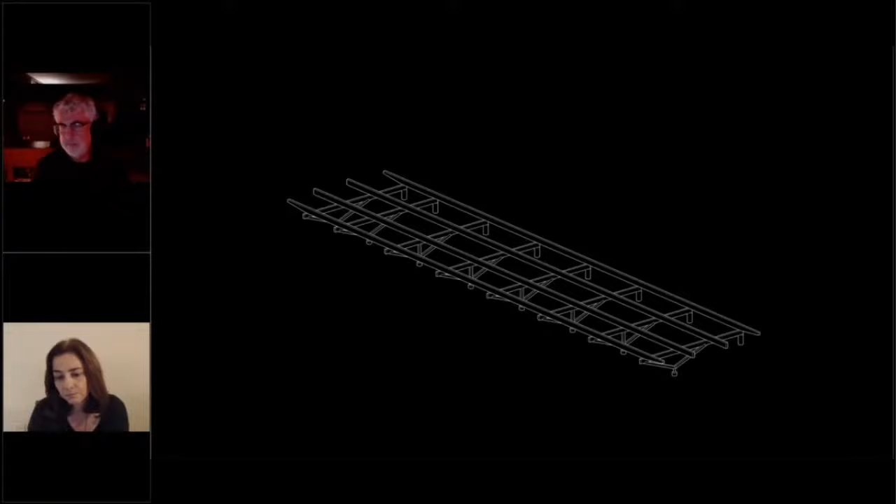The idea was to reach the platinum certification, so many decisions were taken to allow this certification to happen. The first thing was to keep the land in a very permeable way, so we touched the land in a few points. There are some concrete supports that hold the structure, and from those supports above, it's fully a wood structure.

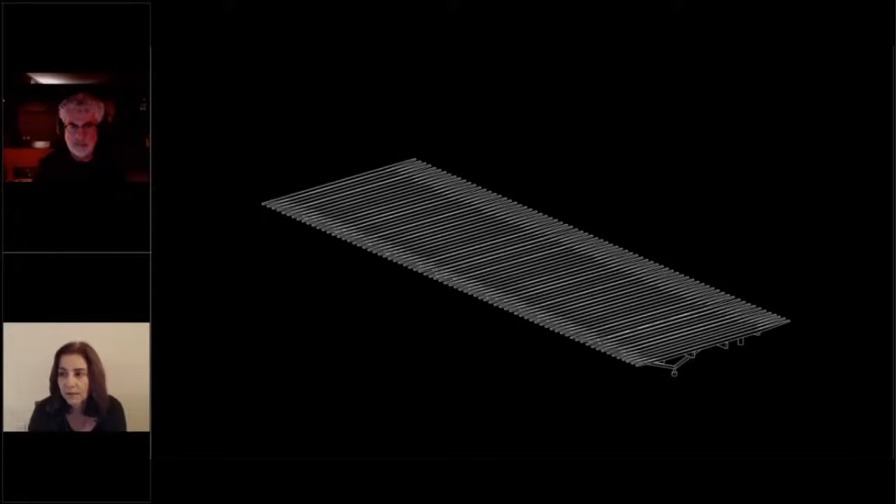The first slab is not a slab, it's a floor structure that holds almost the full house. From that floor structure we have the columns raising and producing a rhythm, a kind of modulation that can sustain all the program of the house, that organizes the program of the house.

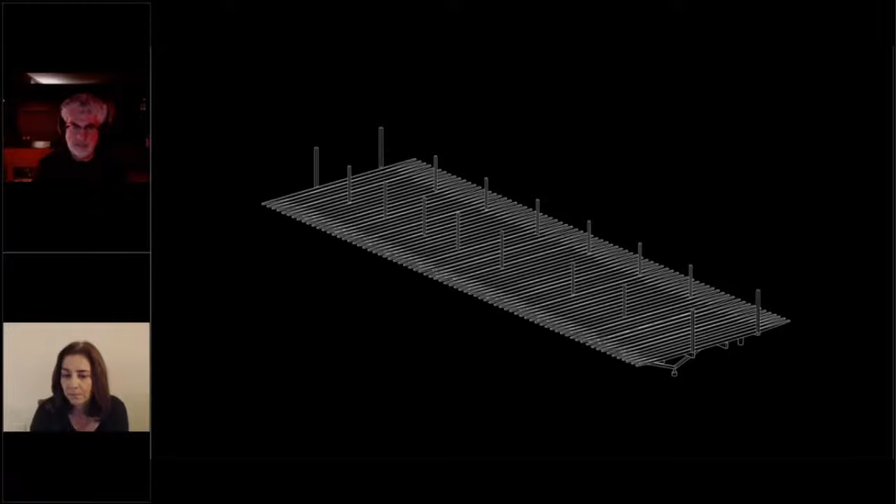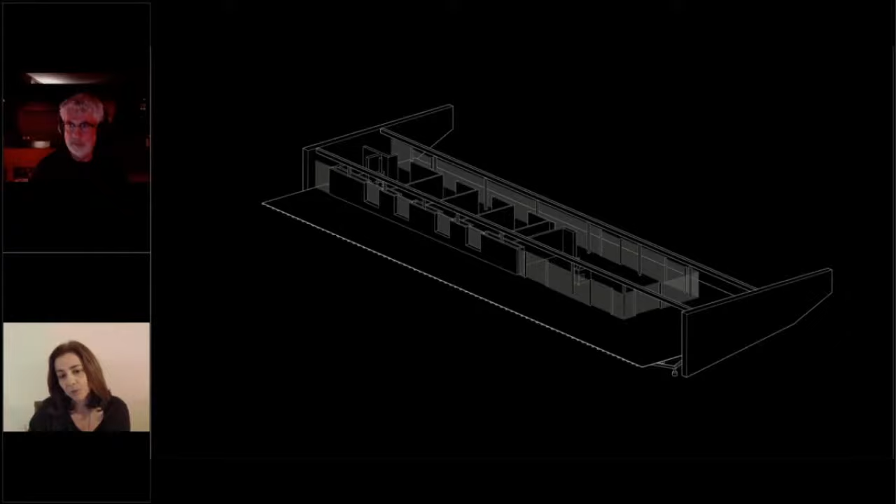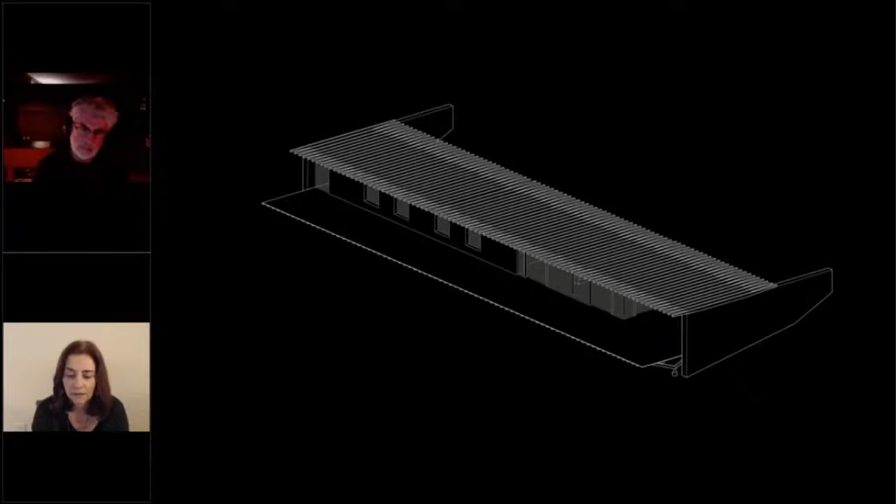I think the slides are passing very slowly, I'm sorry about that. So now you see the full structure, and after that what we see wrapping the house is the wall system. Those walls are also a wood paneling system protected by an insulation PET membrane that helps the insulation of the house. From those spaces we see, from the bottom, the veranda, the living area, bedrooms, and a big open space connected to the view.

This is the reason why the client chose this beautiful location. It's a mountain location with a beautiful view.

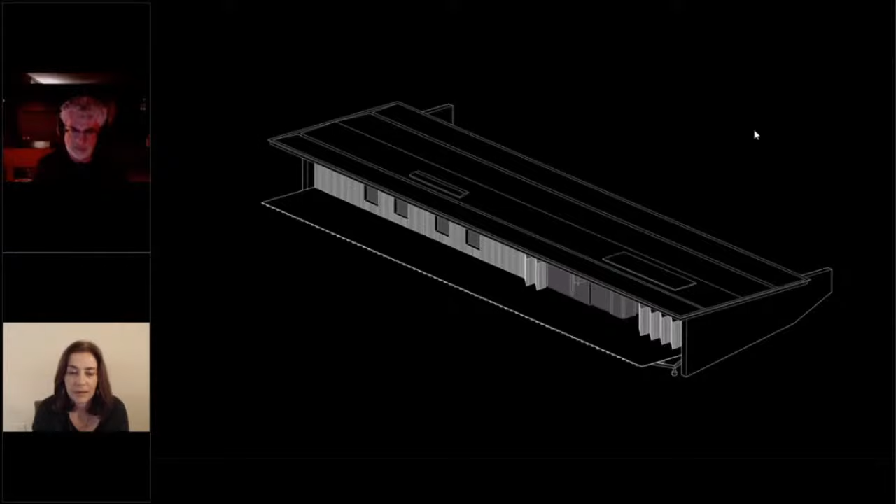The wrapping system, the facade system, is also in wood. We have some sticks that clad both the solid parts of the walls and also protect and create a light filter in the living and veranda areas. So this is the house floating in the mountains and floating towards the beautiful view.

All the elements were in wood. Also, the glazing panels had a wooden frame around, and the decking area is fully permeable. In the internal areas of the house we see some cladding, some tiles on the bottom of the floor, and the light filter creates the full light effect on the facade.

The second example is the Merkaza Volume C, located in São Paulo. The idea was to create a big cube, 15 by 15, without any columns in the center. This is for a client for whom we designed the other pavilion, Volume B.

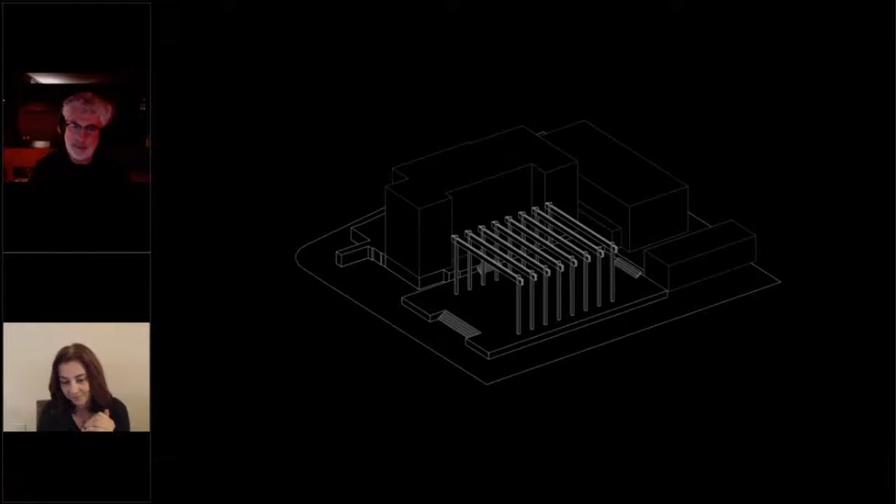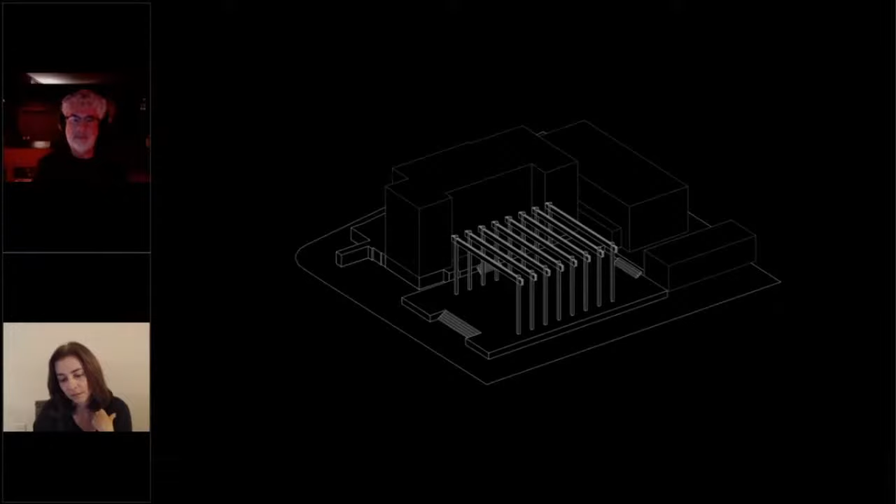The need for this flexible space has driven the structural system to allow a sequence of 8 porticoes that overcome a 15-meter span. You can move a little bit, and they are locked by an intermediate beam that also holds some extensions to hold the facade material.

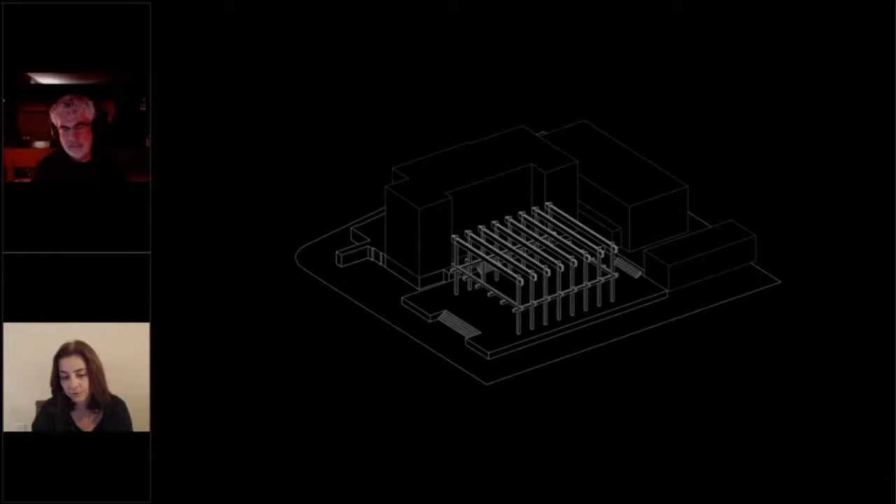The roof and the facade are connected to this structure. The top part is a polycarbonate system that allows light to enter, using translucent polycarbonate panels. On the bottom, you have corrugated metallic sheets that wrap the building.

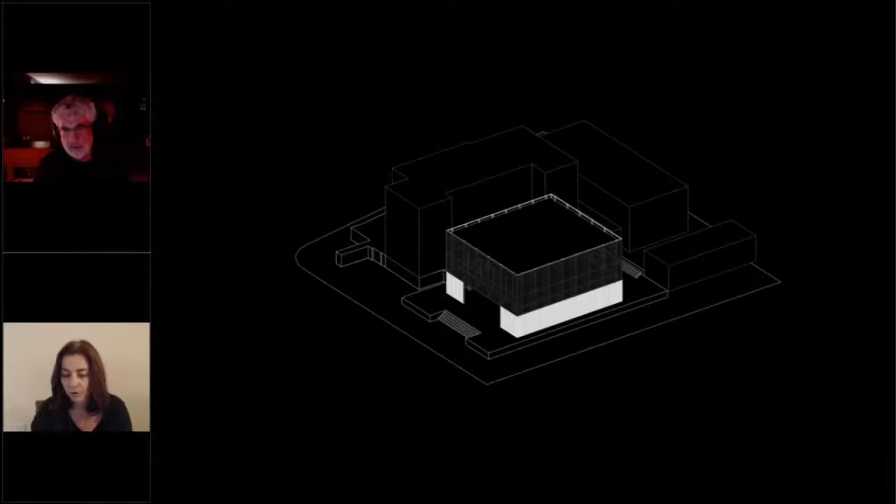On the top, we have wooden panels and just a waterproofing membrane. All the rainwater gutters run on the boundary of the building. The collection of this water was designed as exposed tubes that run behind the column, so you don't actually see them, but they are fully exposed.

It's important to say that this project, like the previous one, had its structure produced and designed by Carpinteria. This is a case where the structure works as the interior space itself - it's something that conforms the space and acts like the interior expression of the building.

The facade is just a wrapping system that protects from rainwater, but the space is really written by the inside. You see the connections between the beams and columns, the metallic connection between the concrete floor and the wooden columns - all designed very carefully in order to allow this design to be as minimalistic as possible.

The corner detail shows the double beam detail supported by the columns at the corner, along with the bracing cables and the substructure that holds the polycarbonate facade outside.

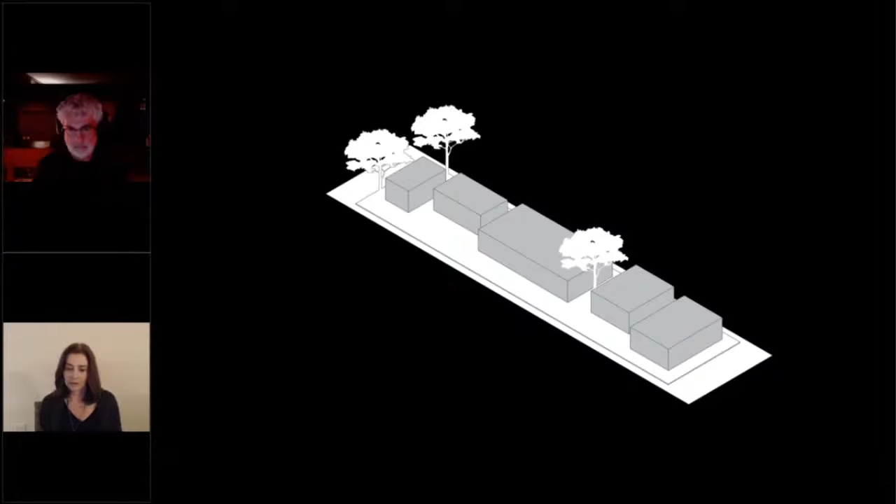The house is organized in a different way. You have the enclosed spaces along this decking area, and they are independent from each other. In the center you have the master bedroom and living area. On the left you have 4 guest bedrooms, and on the right you have the dining area and kitchen.

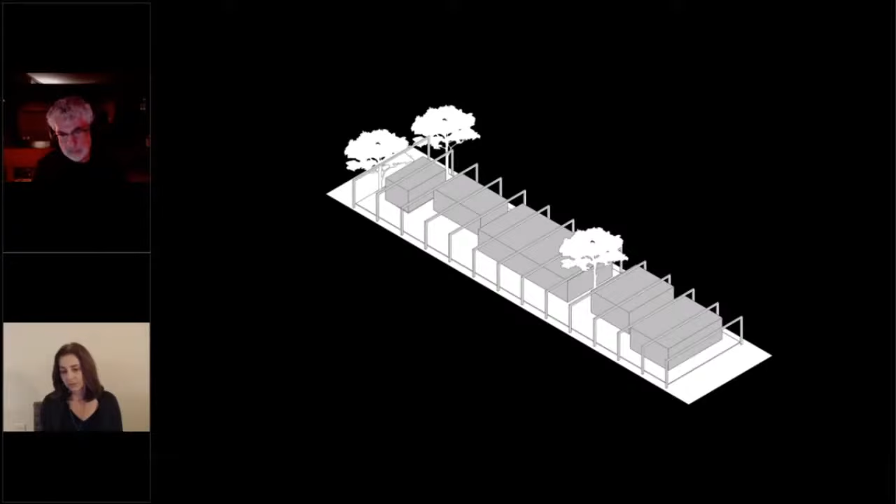This wooden structure wraps the house and creates a sort of intermediate space between what is actually inside and what is outside. It holds just a very light ceiling, a wooden stick ceiling that is not rain-proofed, but has a role to create shadow, like the trees that are around in the forest.

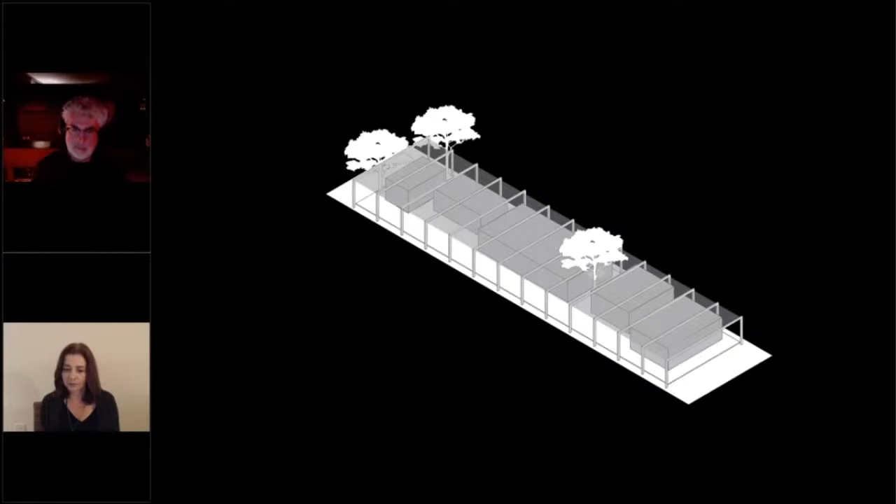This is the condition of the building - fully wrapped by the forest, and the role of this intermediate space is to create this in-between space of what is inside and what is fully outside.

It's a place to chill out, to meet friends, to meet people at night, to have a guest, having a glass of wine. It's a space where you can enjoy nature and be outside, not in as we are in the cities, but in Bahia you are allowed to be outside for many moments. It's a pleasant way, so the shadow is special in that sense to create this space where you can be.

These shadows, these light effects, touch the volumes and move, creating different expressions and atmospheres during the day, but also very connected to nature.

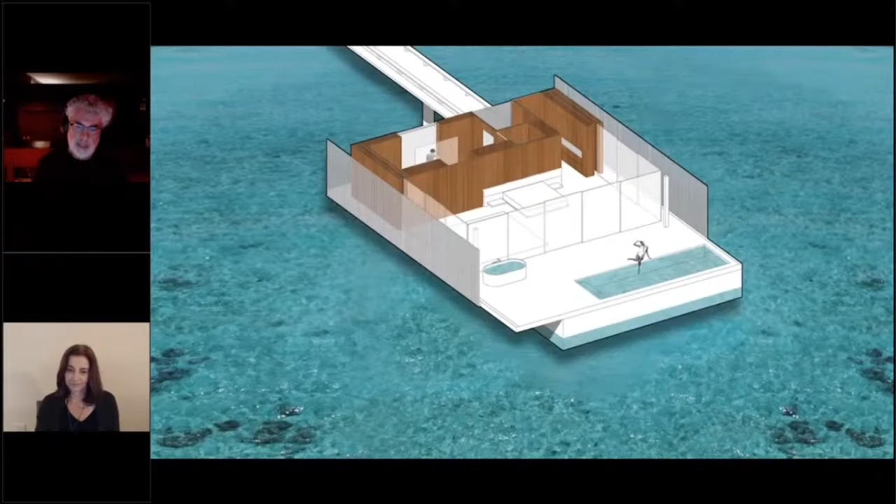The other one, Renata will show, is an art pavilion. We have some art pavilions in some places on the island, and this one is a James Turrell pavilion. Not this one - this is the home, but Renata will show the other one, which is a very interesting project we built.

So I think the connection here with the first impression and the first desire that we had when we started designing the hotel was to create an architecture that could be embraced and surrounded by the nature.

We thought that this is a site where the nature, the light, the sea and the sand, everything is so overcoming, so awesome, and it's very difficult to compete with it. So the rule here was to create a very simple architecture that could just frame the view.

This, in the first moment, we didn't actually realize that the wood could be used for the villas, but actually this one-bedroom villa is a structure that was repeated 90 times.

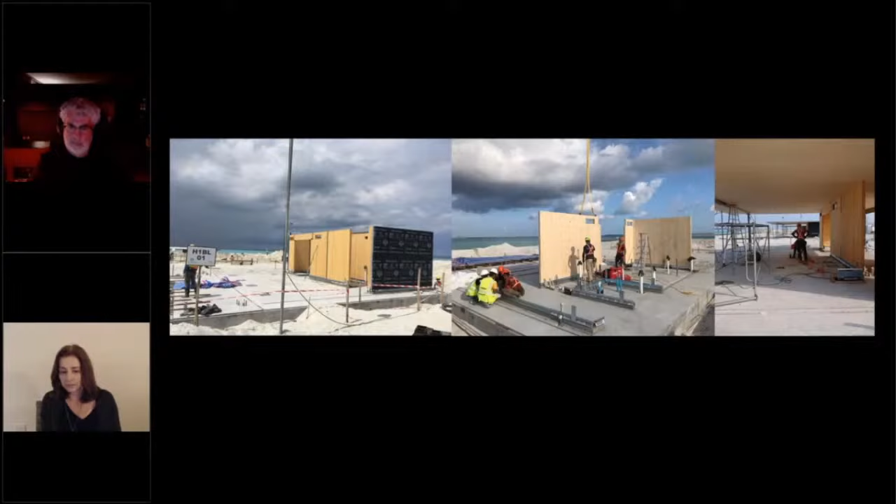It was a decision made during the design development, because the construction company realized that the CLT panels could work not just as a structure, but as a wall system as well, bringing all the perforations for the air conditioning ducts that was fully made in the factory.

So everything was contributing to gain speed in the construction. It was proven to be a more cost-effective solution. Our design was not prepared to show the CLT.

It was not our first decision, and at the end it was not exposed. But it was a lesson that we've learned about how to use the system, to gain efficiency and speed in such a complicated, remote location and setting.

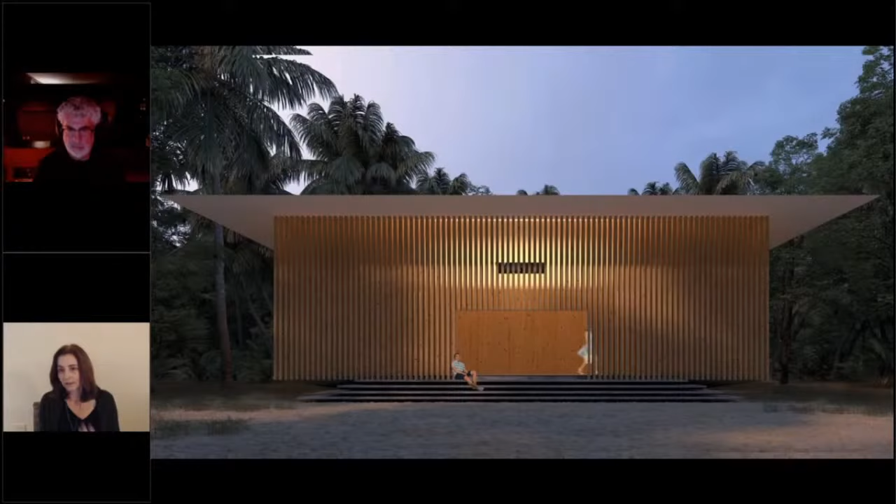And this is the James Turrell Pavilion, a totally different situation. In this situation, we've decided to show the structure. Actually, this is a site-specific piece for James Turrell.

Which is a sky space, a space where you can enjoy this sort of disturbing view of the sky, where you don't know if it's a sky or a painting, but it's actually a hole.

So the main character here is the roof. The idea was to keep this structure on the boundaries and to hold the roof without any columns. So the facade became the structure.

So this is a section that we worked on with Turrell a lot, because it's a matter of proportions. All the roof structure is a wooden frame as well, with wood paneling and a liquid glass fiber system paint that gives this unique surface without any junction lines.

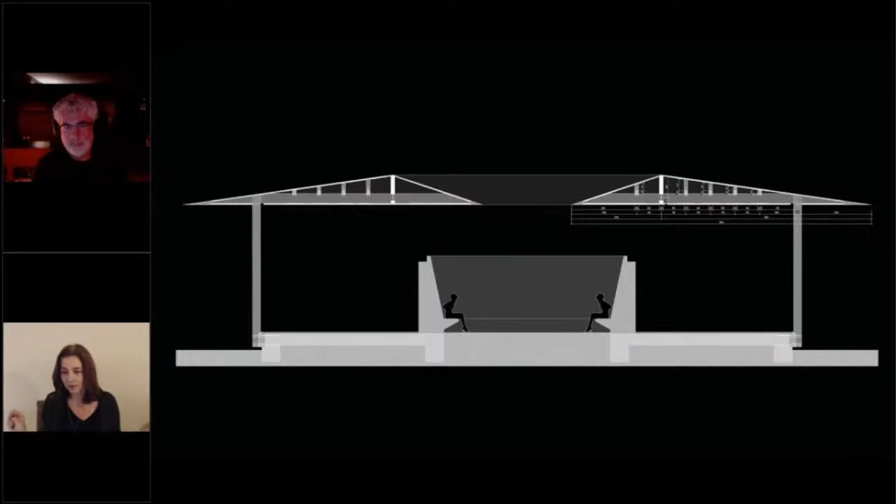And this very thin edge is achieved by a metallic piece that is held both in the boundary of the roof and in the hole in the middle.

It was calculated in Germany by a company called Kempter Fitz, and it was assembled by a Singaporean timber company called Ventured. So it was fully produced outside the site and just brought to the site in modules.

The calculation was funny because besides all the digital material that we received, we also received the review made by hand. So it was nice to see that people are working, not just machines.

And this shows some details of the corner in plan, of how the structure facade is attached to the concrete slab which supports this piece. All these proportions were developed together during the process, because this structure actually became the facade material.

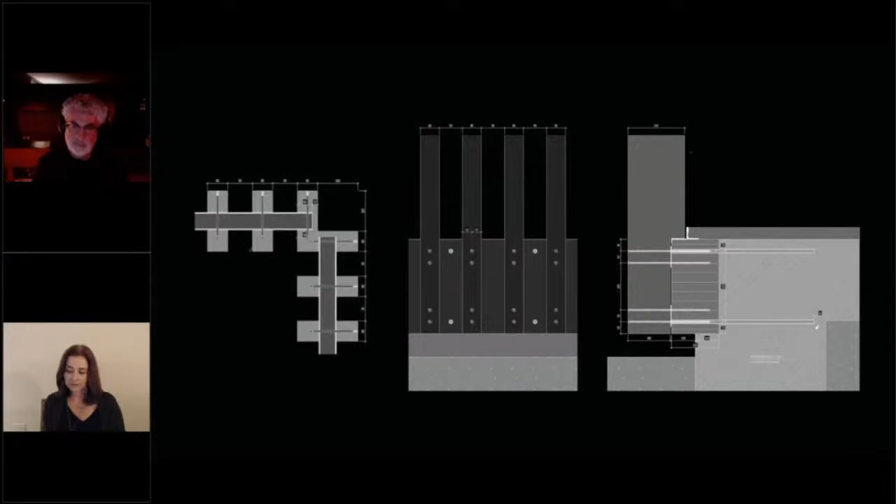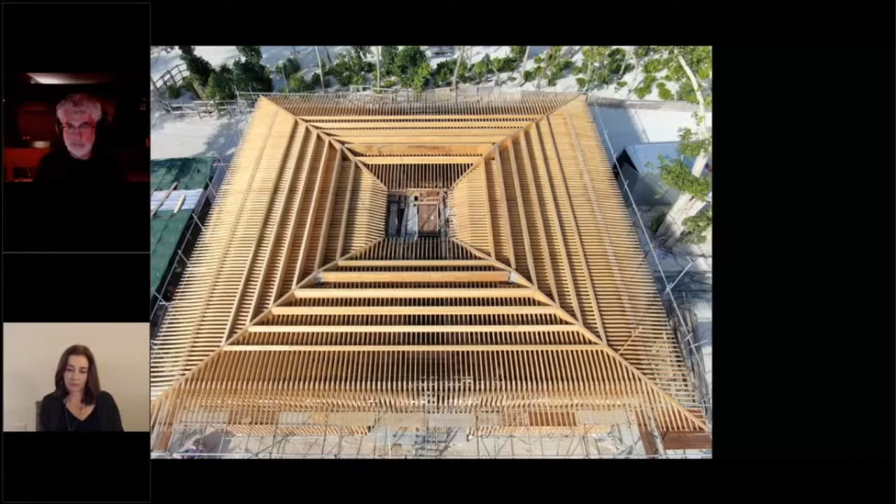And this is how they started the construction. They brought the panels in sections. The full roof structure is supported by those rings that bring to those diagonals and make the load come to the facade line.

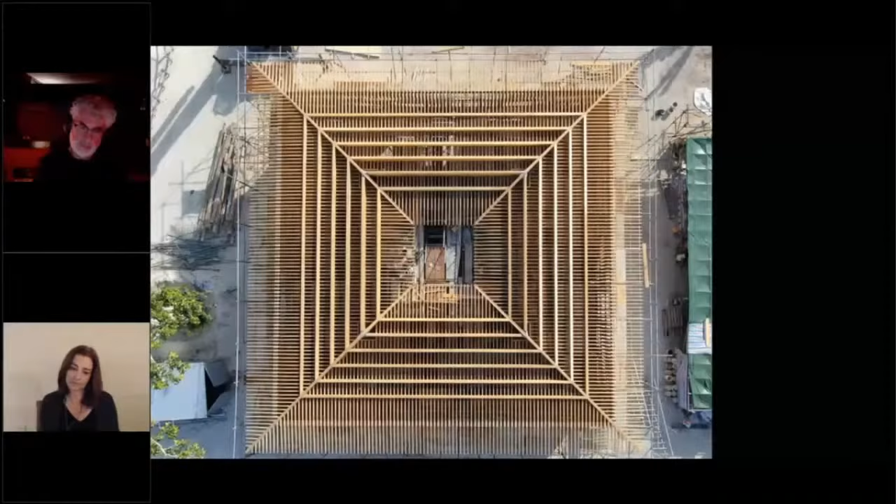And this is a small film of the actual space.

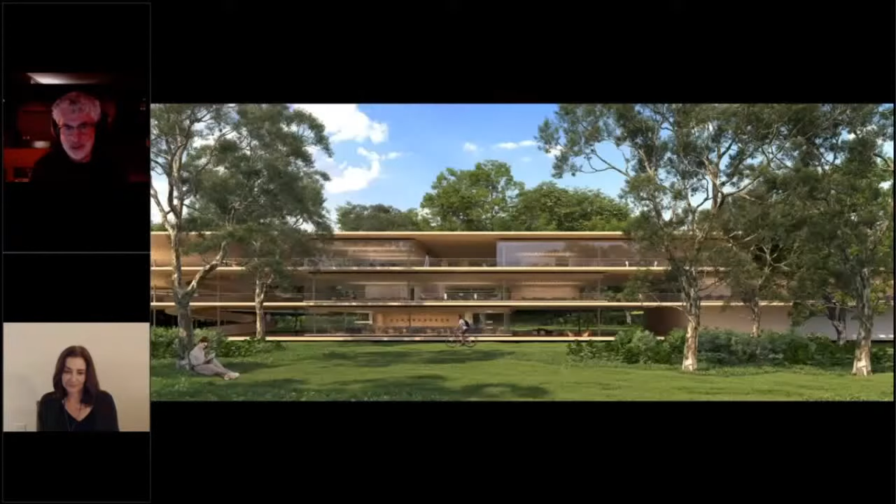The last project is one we're doing at this exact moment. We can show just one image because the client asked not to show it. I can show it now because it will have an opening for the press to show the whole project.

And this is a different way of how to use wood, Renata. Yeah, since the beginning it was a modulation, and we decided that we would use the CLT wooden structure in modules, so the building could be extended in a later moment, or built in sections.

The idea here was to produce an office space that could be fully connected to the surrounding nature. But at the same time, the wood was brought to the project as a sustainable point, because we wanted not just the efficiency of construction speed and to reduce waste in construction.

All those construction points that are raised were also added to the desire of the client to have a fully sustainable project. So all the solutions were driven in that direction, and I believe it would be a very nice project in the future.

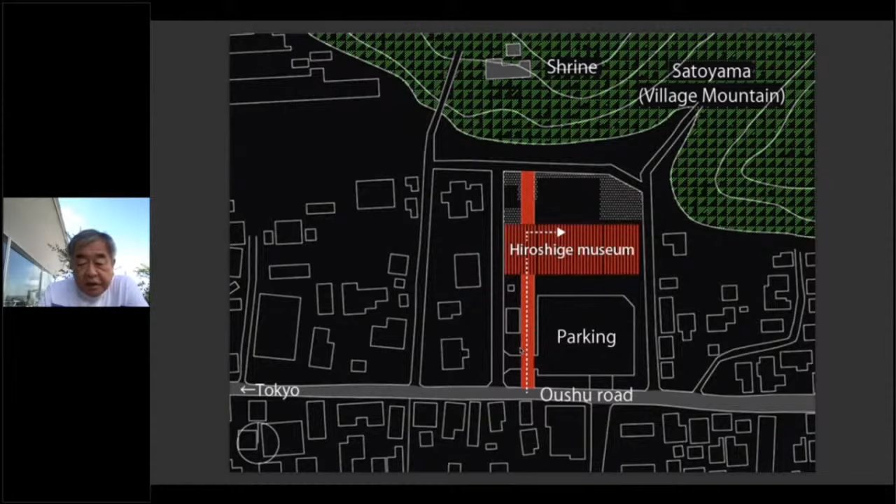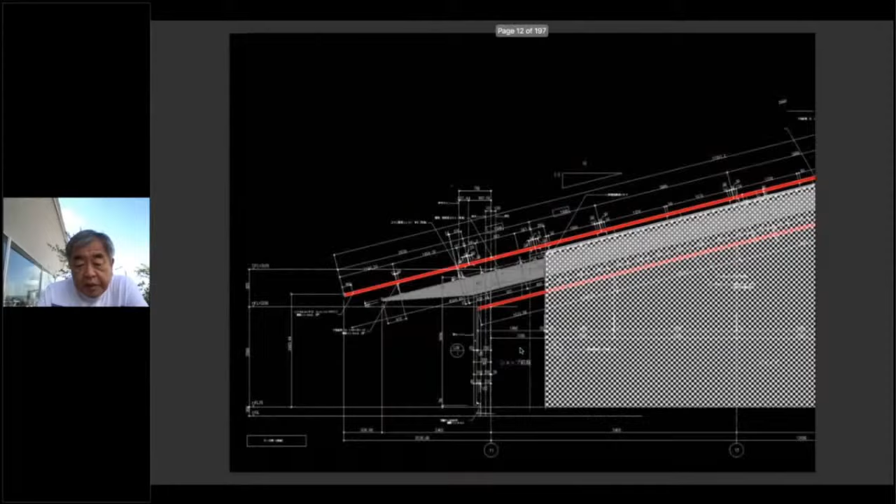The shrine was a symbol of Satoyama. The people respect the god of Satoyama, and they always built a shrine, which sends a message to them. Materially, we used Satoyama wood and rice paper that came from Satoyama plants, and also stone from the quarry of Satoyama.

We also worked with the craftsmen living in the village. For the roof, we were able to use wood as well—it's a new technology coming from the tradition of the thatched roof of Japan.

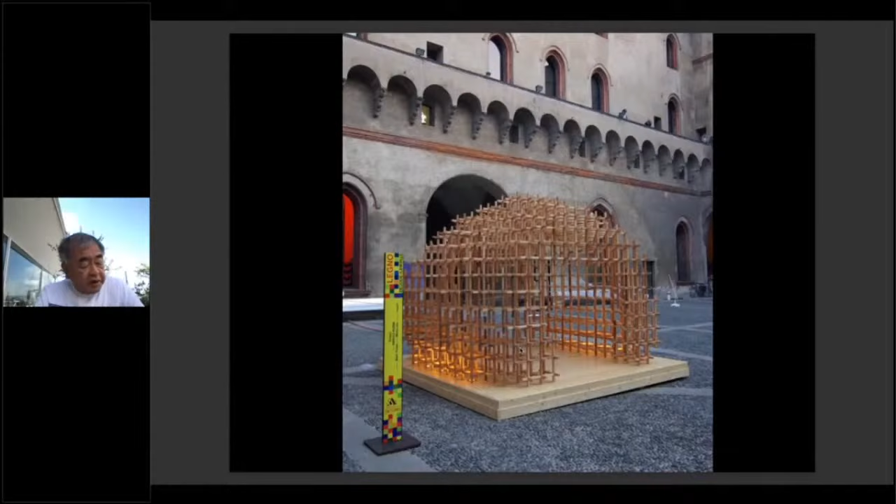This is a small pavilion we did in Italy, but the technique came from the traditional joinery system of Japan. Japanese carpenters didn't use metal, and always cut the wood like this to make it fixed.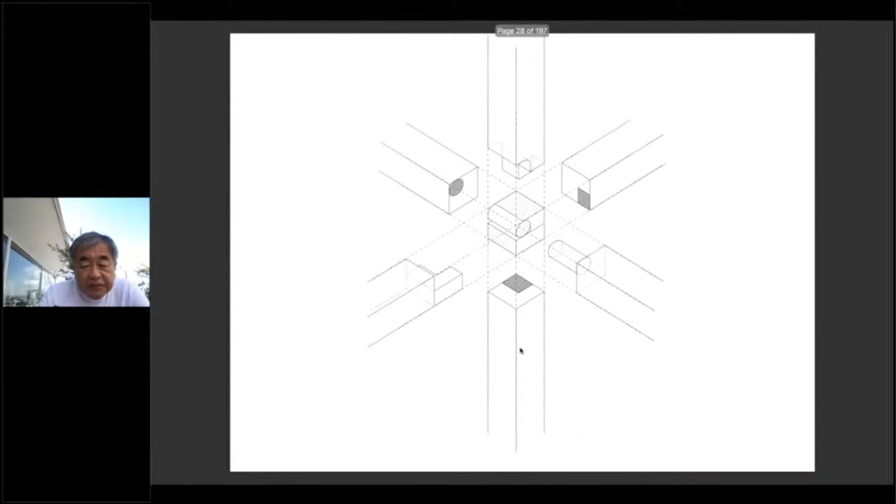The dimension of the wood is 3 centimeters by 3 centimeters, but it's supporting the small pavilion.

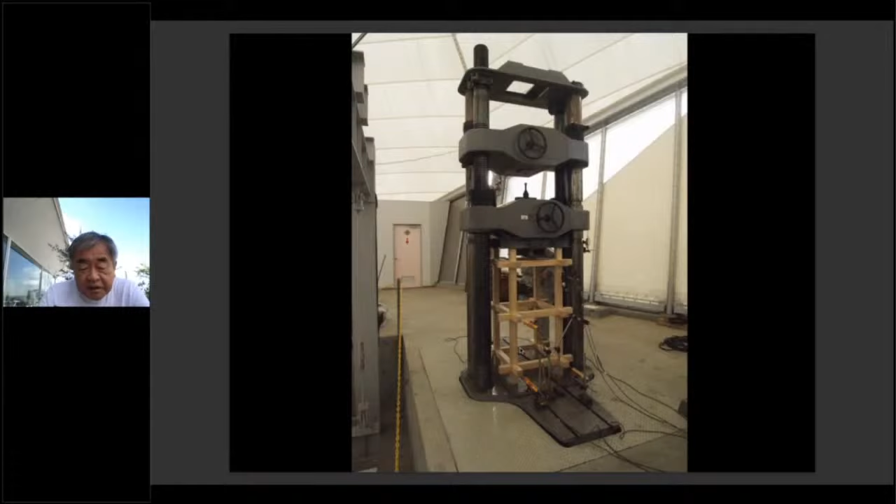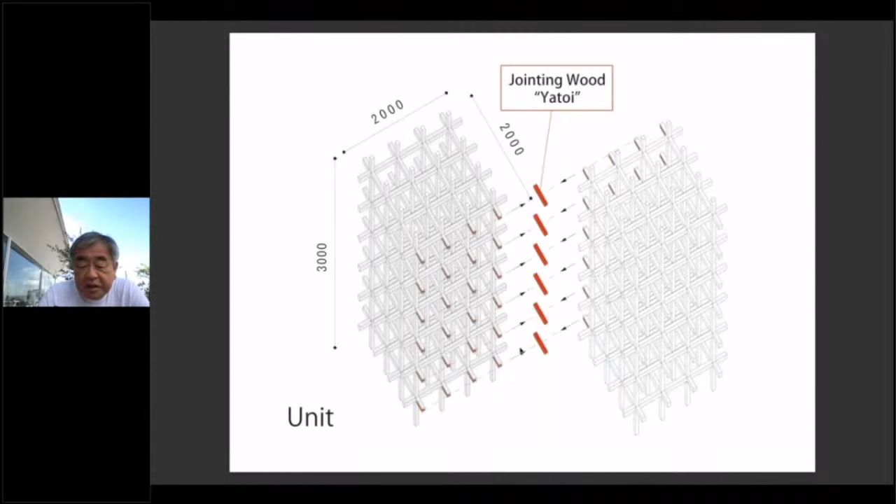After coming back from this pavilion, I built a 10-meter-high building using the same system. We tested the structural possibility of this joint system, and finally a 6-centimeter by 6-centimeter grid is supporting this 10-meter pavilion.

There's no column and no beams—only the grid is supporting the building.

For bigger structures like bridges, we also tried to use wood in small dimensions. This is a wooden bridge in Yusuhara village, where forestry is a very important industry. We worked with a small wooden company of the village.

Starbucks is a big company, but for this unique Starbucks we applied this system. It's a wooden structure, not decoration, but supporting the small building.

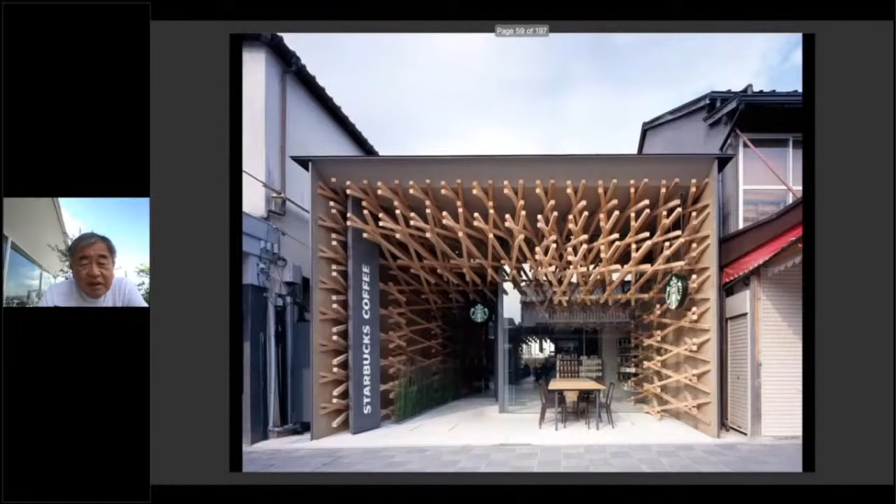After testing this Starbucks pavilion shop, we designed a 3-story building in the center of Tokyo. The dimensions again are 6 centimeters by 6 centimeters, and we tried to avoid metal as much as possible. This is the joinery system.

Simply said, it's a 3-layered system. Two layers is not strong because it's slidable, but 3 layers is not slidable and can fix the building easily.

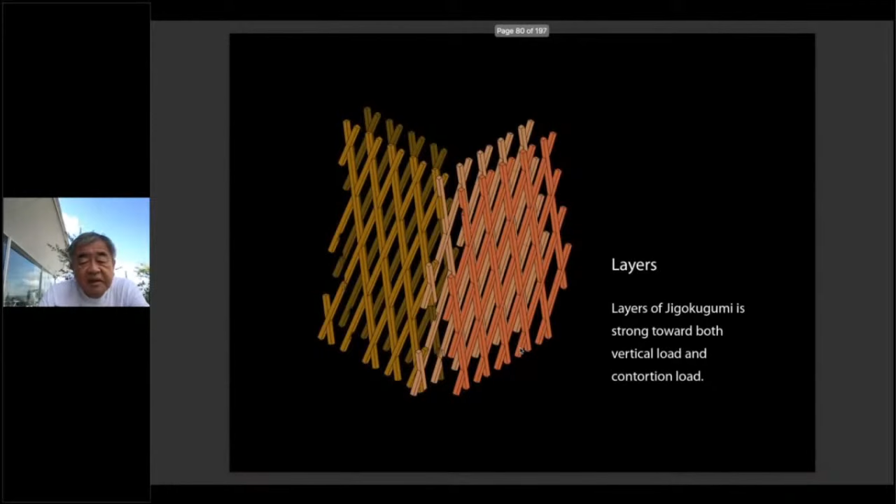Recently we've also been working with CLT—this is the CLT Pavilion in Harumi. CLT is sometimes used as a solid, enclosed building material, but this CLT pavilion is very open and transparent. We combined CLT with steel beams to create this open feeling.

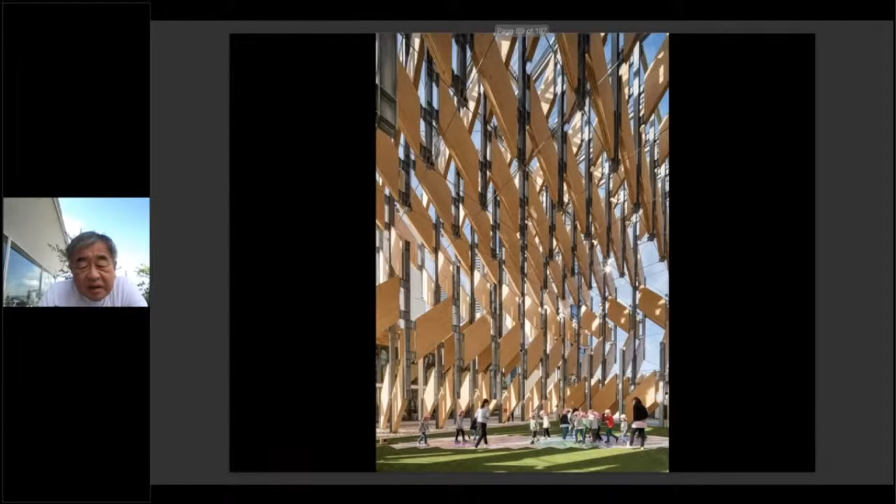This pavilion is used as a community space, and the kids are enjoying it. Adjacent to this pavilion, we designed a small wooden museum.

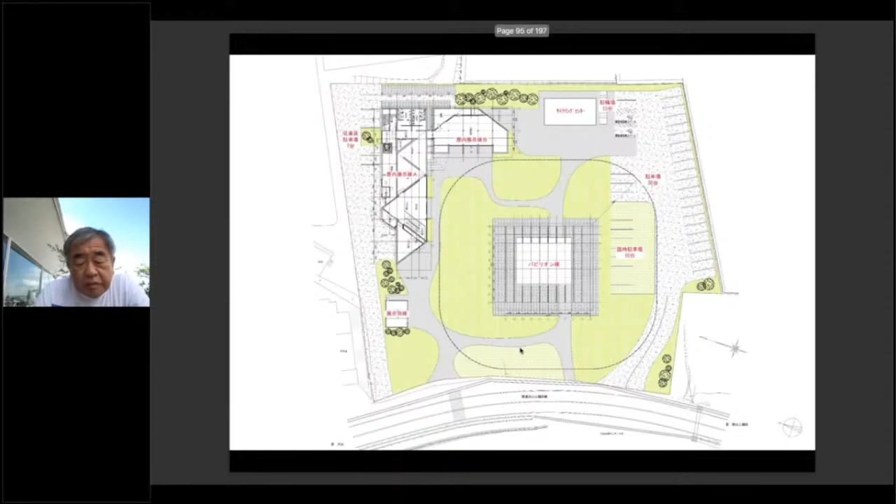The stairs and the furniture are all made from the same wood. Now we are moving this pavilion to the countryside.

This wood came from this village, and we returned the material to the village. They also want to use this as a new community center.

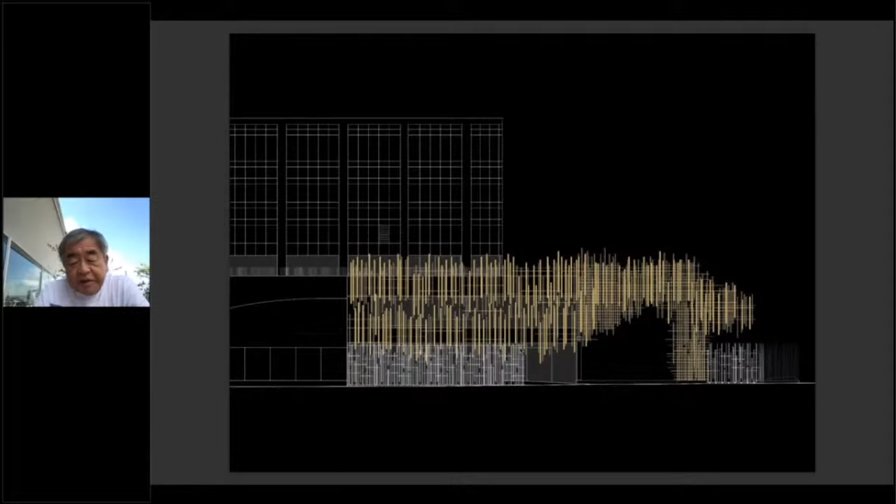In São Paulo, we were lucky to design Japan House, facing Paulista Avenue. Part of a bank building was converted into Japan House, and we worked with a Japanese carpenter, combining Japanese wood and Brazilian wood.

The dark color came from Brazil, as a symbol of exchange between Japan and Brazil. The white string is carbon fiber, supporting the wooden structure.

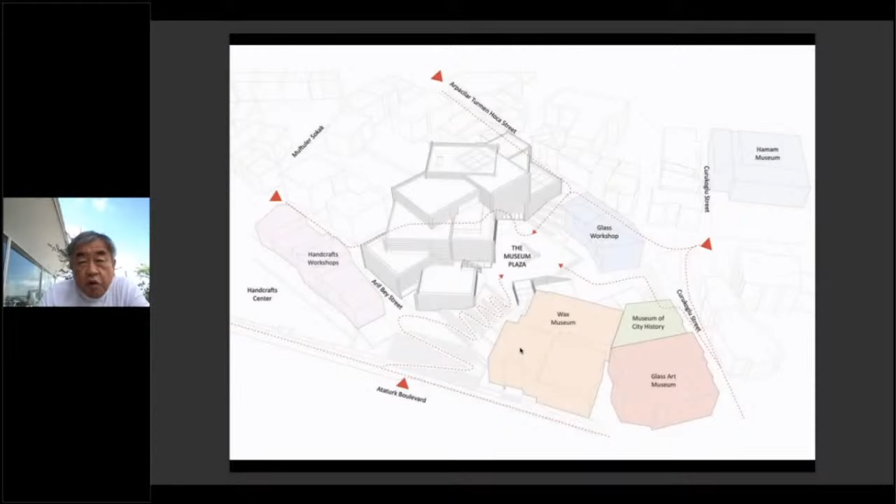In Turkey, we also worked with local material. This is a museum. Before working on this project, we thought Turkey was a country of stone and brick, but historically, in the Ottoman period, they were building wooden buildings.